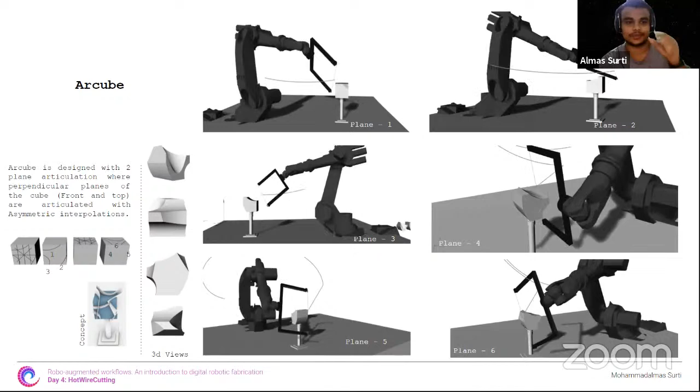Okay, sorry about that. So this is Arcube. What I try to do here is, simply put, hot wire cutting is basically a single line. If we are cutting at multiple points, it should be in a single line, so we can cut like a single curvature only using the hot wire cutting. But if we take perpendicular sections of attached parts, and draw different interpolations into that, we will be able to achieve geometries with double curvature of different radiuses. You can see the first 3D view is a very steep curvature, and then it's decreasing. So that was the entire concept.

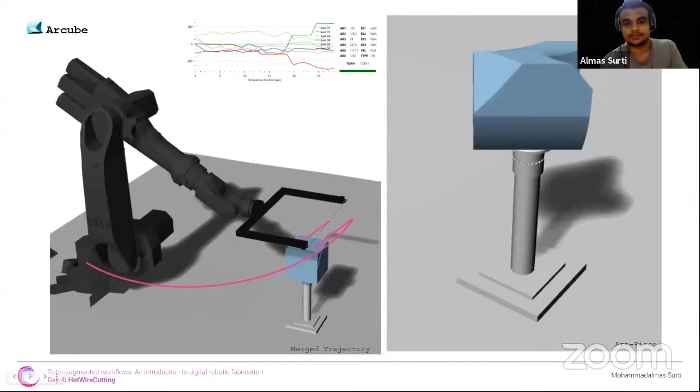It is made out of 6 planes, in 6 perpendicular planes in cubes, front side and top side. I have mentioned like 1, 2, 3, 4, 5, 6 in the previous slide. So all planes are cutting like this, a demonstration of that. If you merge everything's trajectory, then the next slide is the merged trajectory, and this is the final art piece.

Look at this dance of the robot, really, it's very fluid. What is compelling to me is really the form, and I don't know if you had something specifically in mind, but if I look at the second one, I think of it as a positive space, like a built space, while sometimes this element seems more negative. So that was the idea, to combine both curvatures. Like I mentioned in the previous class, I'm developing reconfigurable molds, more into anticlastic and synclastic curvatures and the possibilities of that. So that's what I'm trying to explore here.

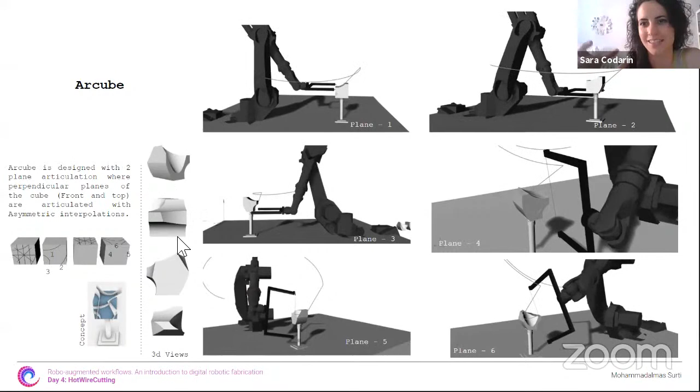Oh, that's great. I think it would be really interesting to see this deployed in the next step, and try to use this as the negative space and cast plaster and see what happens, and tweak things and rotate this and see what happens. Even if you don't work only with 90 degree rotations, but try to position that, let's say 45 degrees in the space, and see what happens in the resulting gaps, in the relationships between the container and all the gaps that you create. I think it's a very interesting exercise.

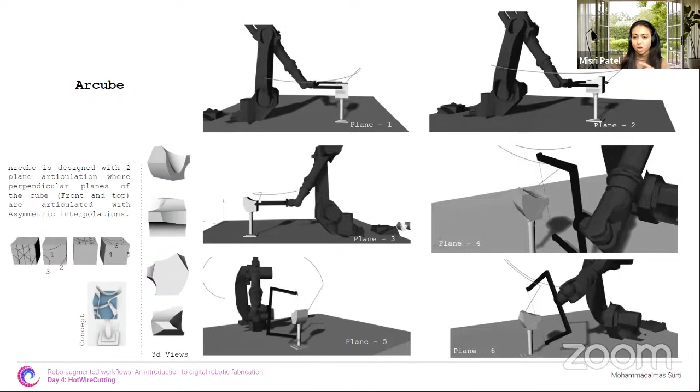Yeah, and the great part is, even when you cut the piece out, especially with the remainder of how you cut the first piece, which has this steep curve, in a lot of ways that also becomes not something you throw away, but something that could potentially help you transition to a next block. So that was the idea, one curve, and then the perpendicular curve will make it double curvature.

Jeff asked whether it is touching the middle thing or not. It's not, I've checked it in simulation, but I don't know, you need to check it on your end. But in the simulation, it is not touching it. I have faced one problem actually when we were merging all the trajectories of the 6 planes.

Handling those were very difficult. So what I did is I took like 2 planes at a time and tried to create a path. The first path I disabled, and then subsequently I tried to manage it, taking 2 trajectories at a time. Then if you accumulate, you will get the results. That's what I found out. Oh, that's a smart idea.

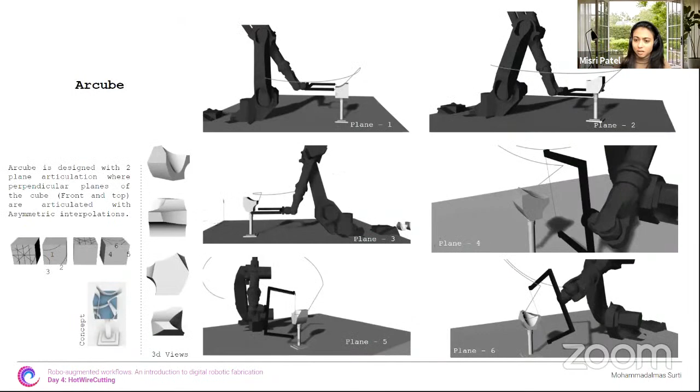Did you have to add more heights for the Z offsetting? Yeah, so this next one is based on the previous path. Then I can change X, Y, and Z. That was pretty simple. Earlier, for an hour, it was so messed up. And I tried to use it with 6 planes. Yeah, well, you crossed that hurdle.

And I was laughing a second ago because I saw Jeff very scared about this, but we'll make it work. I'm really excited about this. Let's see if we can implement this by the end of the day.

Jeff, are you laughing? Are those files already on Google Drive that I can check? Yeah, so I uploaded that. Okay, awesome, thanks.

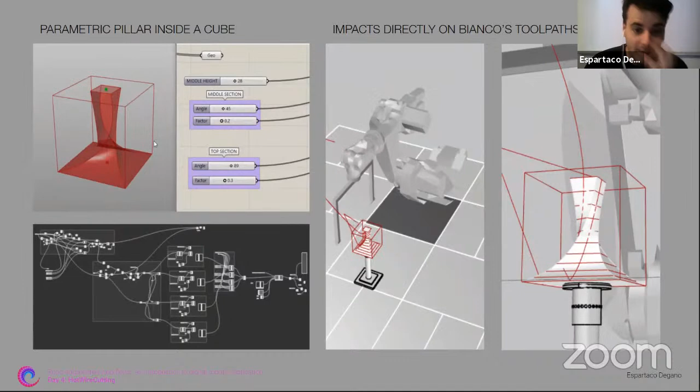Espartaco, let us know, I love your name. Good morning. Good morning, guys. I just woke up, getting coffee? Yes, yes. The coldest days of the year are just this week, so if you see me with my hat or the coffee... Really? Where are you joining us from? I'm in Argentina right now, but I'm moving in a couple of months to Spain, to Barcelona, the IAAC, the Institute of Architecture there. So to do some courses on robotics there.

Well, my work was about doing this parametric pillar that was inside a cube. Took me a lot of hours of coding, but I did it. I had this idea of doing 4 cuts, the same cuts, but rotating 90 degrees. My goal was to be able to modify parametrically that cube and impact it directly on Bianco's toolpath. So I did a lot of tests.

It's a simple process, but the coding was difficult because I had rotations on the form that later on the robot seems to be harder to control, clear without cutting the cube. So if you see in the cuts, I put an out point from one cut and out point up in the cube, and then the rotation of the hot wire doesn't cut the cube until the next cut. So I chained like 5 cubes and it seems to be okay, with no errors to the robot.

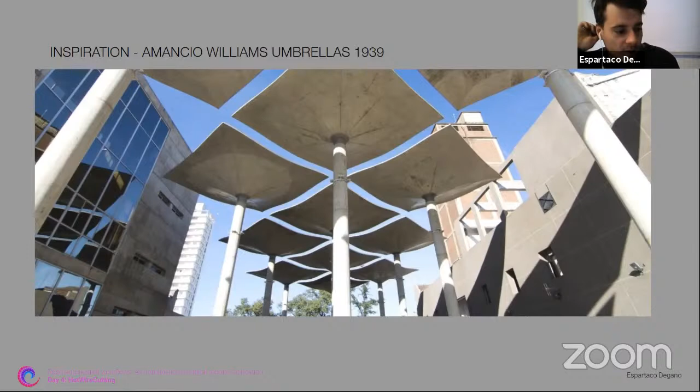Well, that's it. And actually, the thing is, we haven't introduced yet a rotation platform, because in this case, basically every cut goes with a rotation of 90 degrees. And you imagine like programming one cut and then you can rotate the platform and then you do the same cut over and over, right? Yes, by rotating.

Thanks for explaining, talking about the difficulties in fixing all the rotations and the script. Yeah, but it's also our limitation in terms of the hardware that we are using right now. But I think the next step is really to look into rotations and try to simplify some operations while using the algorithm.

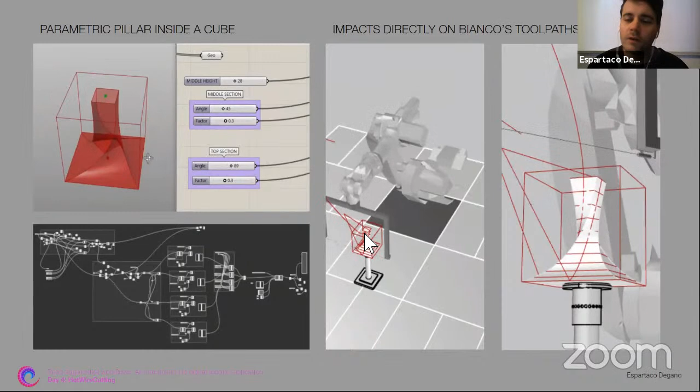Well, in this case, the rotation was four sides. I didn't think at the time that it was going to be so challenging, but I don't know. I leave you guys, Jeffrey, don't kill me, please.

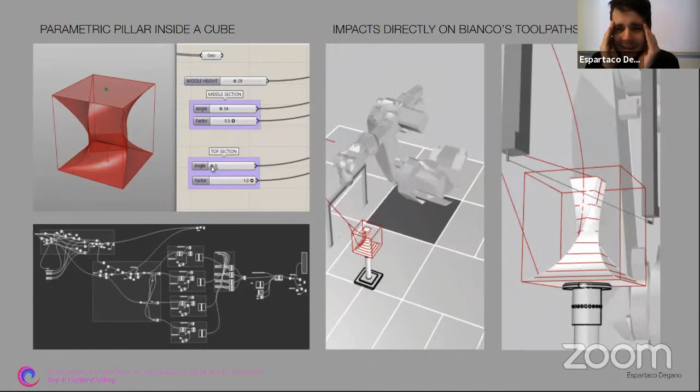Oh no, I think this is a really great way of approaching it because it keeps the four sides planar. It twists the wire, but in a way that we know is going to be predictable. So I think it's a really simple and really smart way of approaching this. Yes, I tried to keep the arch vertically on all the cuts, so it took me a lot of time to figure out how to do that, but I managed to finally present this. So I leave you guys with the files.

One quick question: was this the max amount of twist that could possibly happen? And if you were to twist either the top or bottom curve slightly more, would it start self-intersecting?

I tried the parametric approach, like 180 degrees, a flip. This form is like the nicest approach for this, but it can turn more - the middle section has to be bigger. When you want a smaller section in the middle, the rotation makes it smaller. It kind of rotates one piece around 180 degrees, like a flip, and it turned out great. I think it may be possible to take it further, but I don't think so because the form or the cube has to be like 3 cubes for the rotation to not break the form.

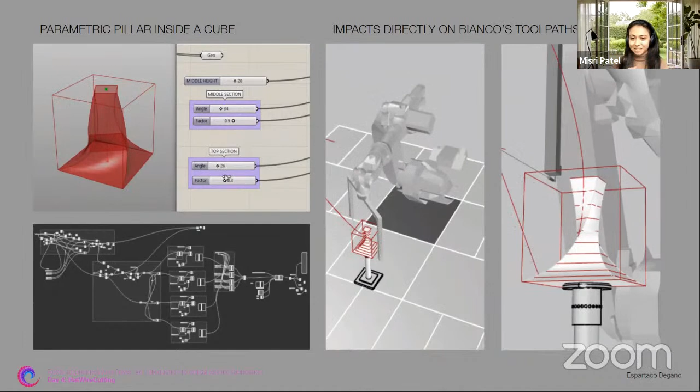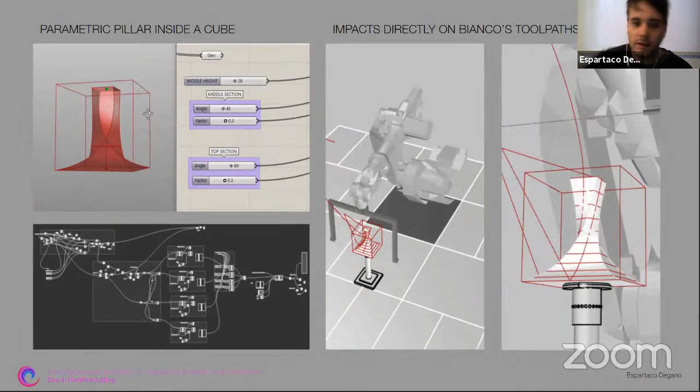It's great that you're thinking between two scales, a 6x6 model versus how to scale it up, so kudos to that. I think when the form is higher, the robot will be rotating from the side, not from the top. You have the robot above the cut, and the height of the arch for cutting. I think the scale of the model has to be a lot smaller to present more rotations from it.

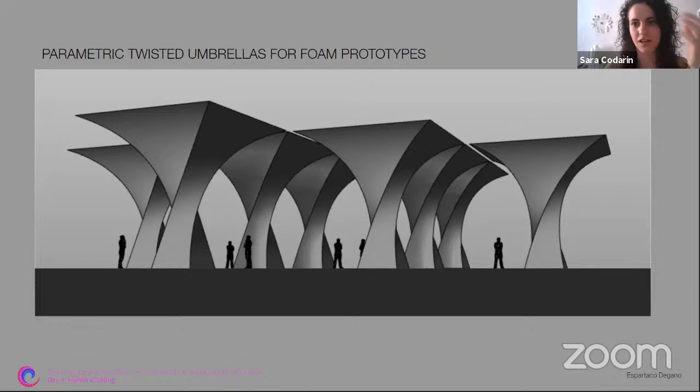It's also great to look at the approach - thanks for picking up on this strategy of imagining this larger scale with diagrams and simple rendering. I think it's very effective, and hopefully in the last assignment you'll feel more relaxed, not having to solve every single rotation for implementation. You'll have a slightly measured degree of freedom, which should help you go through the last part more smoothly. Thanks for this, it's very compelling, great to see the possibility to talk about different scales. Good job, Espartaco, love it.

Wow, thanks guys, thank you a lot. You're next, I like this. Thank you. How many? Okay, one slide.

I almost wanted you to pour plaster in that already. Oh my God, yes.

I wanted to experiment with the rotation to create a wavy surface, and it was really hard to organize it so the robot doesn't have any errors. I rotated the surfaces, but I think I should work with the planes more to find the best approach so the robot doesn't face errors with other surfaces.

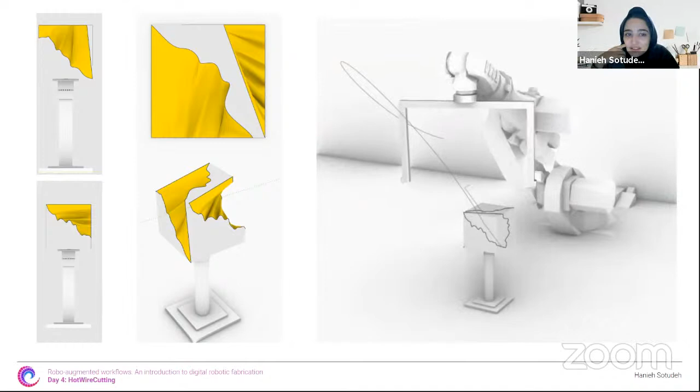And yes, I think these curvature faces look nice in the box, on the box.

Am I the only one imagining this material being gold? Like really gold pouring, a gold surface. It seems like a jewel, like a piece of jewelry. It seems so precious from these images.

Yeah, for sure. A couple of days back I'd seen a project where the cube was made out of concrete, and the yellow part was cast bronze or brass, and they were using that as furniture. So I think it has a really good product feel to it.

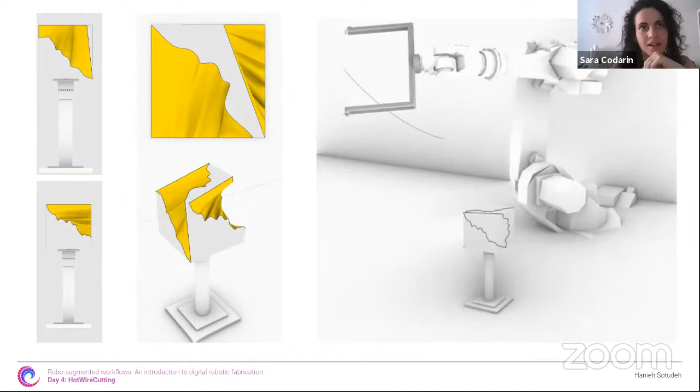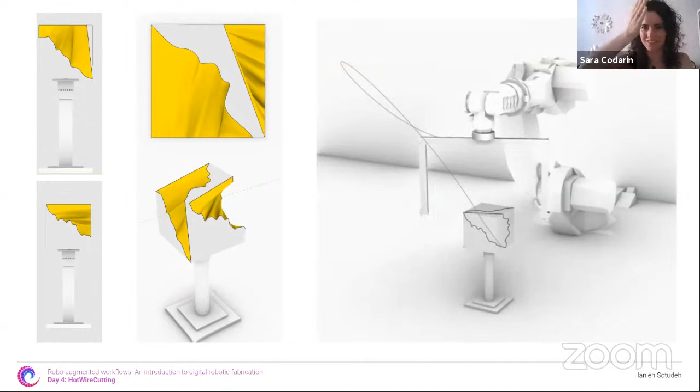Absolutely, and there are many ways to look at this. It seems the inspiration comes from the Grand Canyon, like a piece of rock carved by water over time - these layers of rock being the bio-inspiration that drove this design. I think it's fascinating. It's interesting to see this, where you have a couple of smart moves, and you can picture the negative space and imagine that, maybe flip your object and it becomes a building with some interesting sacred moments you can discover inside when you get into the space. I think it's guiding me through many worlds of imagination somehow.

Yeah, good job, it's great. I don't know, I'm trying to see the reactions from the B Lab as well, but since things are quiet there, I don't know. Let's keep going, for the last one.

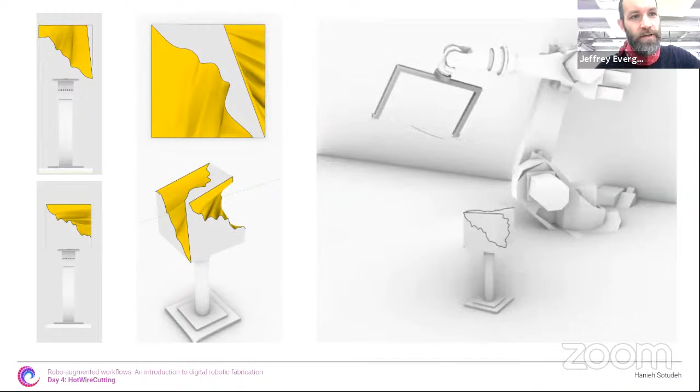Have you seen this one, Jeff? Oh yeah, I saw that. We're gonna have to take a real close look with the slider for potential collisions as the bow moves. Like from the pictures on the left, the yellow highlighted parts, one of them seems clear enough where and how it moves through, but I can't quite picture how the other one comes out.

So where the pointer is currently, there's kind of a line that goes diagonally across the top edge, and we see parallel lines sinking down, and then I don't know how it twists and comes out that vertical edge in the front. That part doesn't totally make sense to me. Then the slice on the right hand side of that cube, where the pointer is, seems a little more clear where it goes in and how it comes out. But that one on the left is really confusing to me, and we'll have to take a close look.

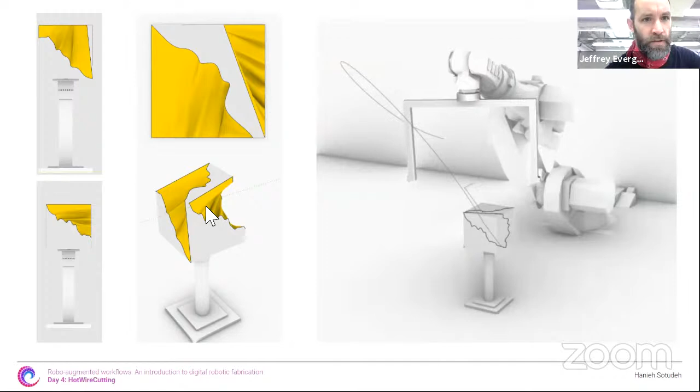Yep, the left one is similar to the right one, just because maybe I should put the other perspective of the cube to be more clear, but the right one is almost similar to the left one. They have similar approaches and similar curves, but with a little differences.

Okay, I can't really draw in here like Misri does really well, but if the wire enters the front vertical edge and then kind of pivots around that front lower corner, and then when it gets to the back as a diagonal line, changes and pivots around the top back corner as it comes out, then I can kind of picture an entry and exit for that one. But like I said, we'll just have to take a real close look.

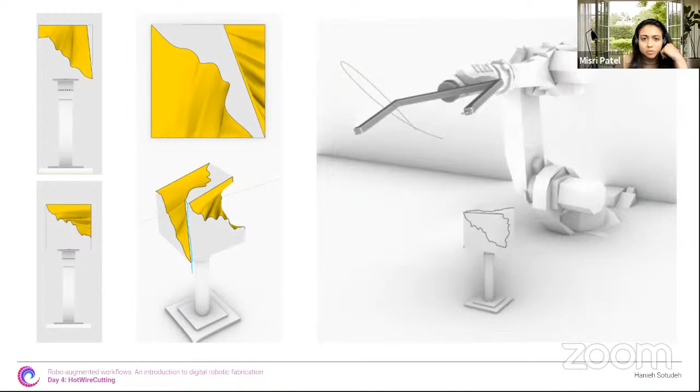Yeah, it almost feels like - I'm trying to imagine what the division points would be. Is this how we're dividing it? Is this how it's sort of, yeah, just like that? I have a feeling once the wire does start to do that, it's gonna be true to this line right here and this line right here.

But what happens with the surface would be a resultant of the tool path. And I have a feeling that might not necessarily match what we see in this digital space, just because the curve right where the cursor is seems longer than the other one, or maybe it's the other way around. But the fact that we're trying to use the input curves to merge the two lines, almost join them, and then extract the midpoints as the plane to align with the wire of the cutter...

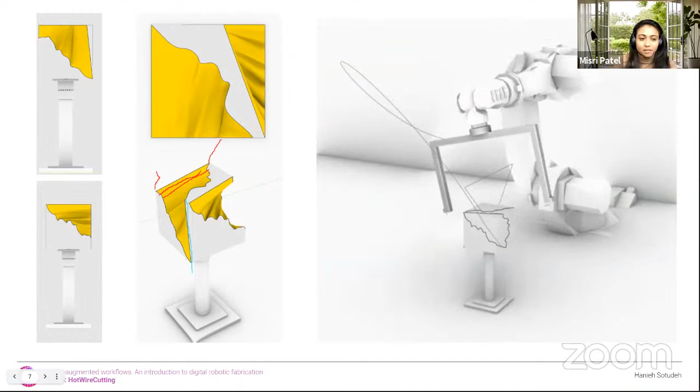I think that might give us a slightly different geometry, but it's definitely worth a try, because this adds that notion of the limitations of a tool, but also how do we simulate that to get a better handle on what to expect. It's definitely worth the conversation to take it forward. Yeah, absolutely, so thanks a lot for your work.

So who's next? Let me see. Slides, that's okay, my work. That's my work. Hi, everyone.

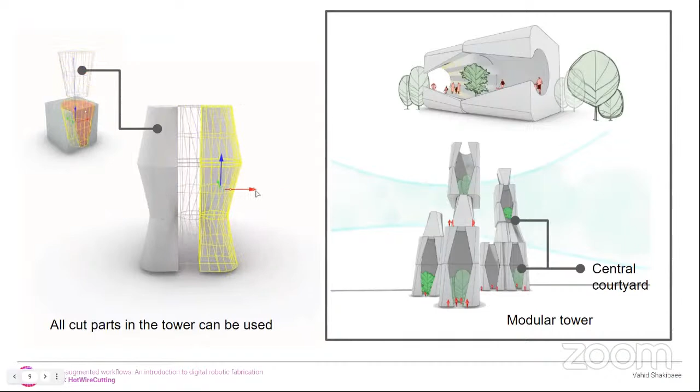And this modular tower, I try to use the cutted other side of the cutted cube. That's a connection between the modules of the tower, and the cut pieces are the floor of the central courtyard. I say that central courtyard is in the middle of the tower, and that's it. It's my work.

Wow, you really deployed this notion of stereotomy that we described yesterday, in terms of really working simultaneously in two parts and then they can come back together. That notion comes from the craft of cutting stones. So it's really effective to see this approach deployed in a way that we can see both spaces, the positive and the negative of the same geometry, and then start to populate the space with these elements.

I think it's again sort of a deterministic approach in which you're trying not to waste resources and to create the most out of it. I think it's a very compelling example.

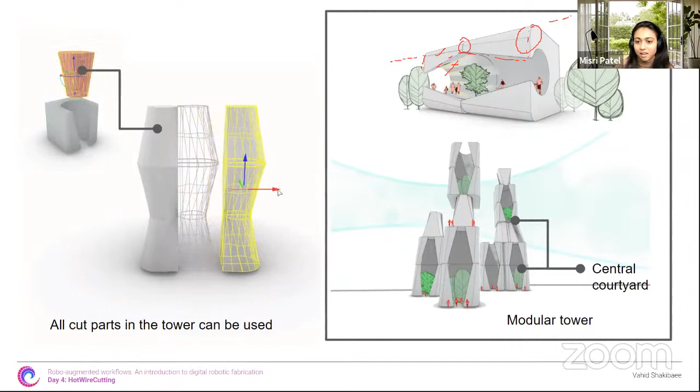I'll be sure to drop a link to that project, but this comes super close to it. It's also good that it's challenging methods of production on construction sites, and pushing the boundaries of what's really happening on site right now.

And Vahid, in terms of scripting, how was it? Did you have specific difficulties? Was that easy or difficult to script? No, it's that easy. I mostly draw the curve in Rhino, and export that into Grasshopper for simulation with the robot. It's not so difficult to me.

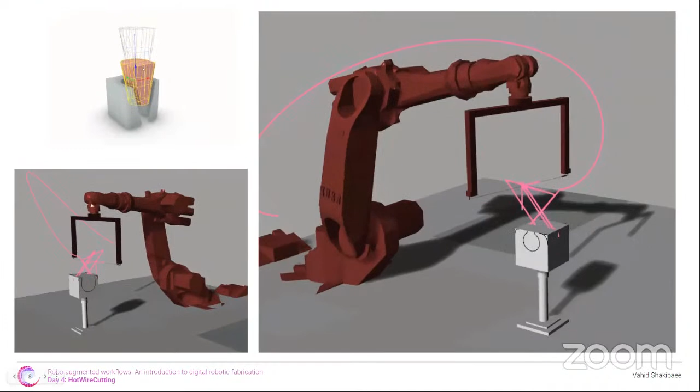Great, so you optimized literally everything from the design to this notion of use of matter. I think it works pretty well. Thanks a lot for your work.

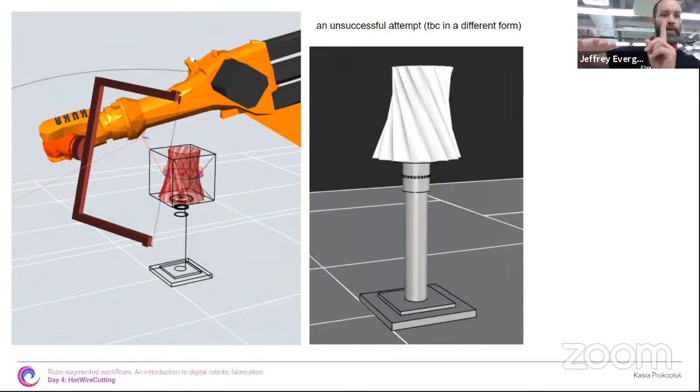Because it's going to need to make some motions where it reorients itself. If you wanted to try a single swooping motion, another option could be, if it was designed in Grasshopper parametrically, to change the angle. That might help in this circumstance because of the position of the pedestal relative to the robot base and how much reach is necessary to get around. If it didn't have to go quite so far, it might be able to do it in a single sweep. So those are my two ideas.

Since it's vertical, I'm curious if you tried putting it horizontally and if that changed anything. Yeah, I tried first to put it horizontally and cut it out from the cube. It was a little bit smaller then, something like a Peter Zumthor, to see the negative from the inside. But it was too difficult for me.

But did you upload those files? Not yet. I think we can try to take a look and work on it later. So, as Jeff said, a little bit longer and send you the files, and we can fix it together. Today Jeff and Emily are in the build lab, and they'll be available to implement this, so I'll try to help you out so you can have this object as well.

Let's try. Thanks a lot for this work, fascinating, and hopefully we'll be able to produce these things. Other comments? Otherwise, I'll go.

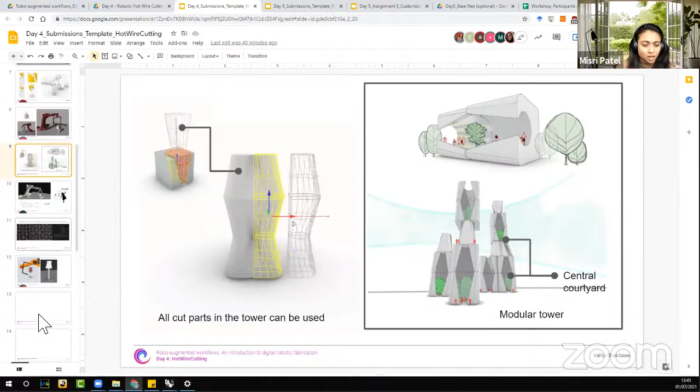We have 15 minutes. I'm trying to dig in because I think maybe 2 years back, someone was trying to pull off a similar project like we saw on slide 12, and I know they managed to do it. So I guess it's a matter of rotating it at the right angle to accommodate everything. Let me dig in, and towards the end of the lecture, hopefully I find it and can show that project to you, which was also at the same scale. So hopefully that helps.

Thank you very much. Thanks, Misri.

Submission template, no. How about we go here? Then I have a couple of base files to show you. But let's start from this first. Let me do so that I can see the following slides. Here we go.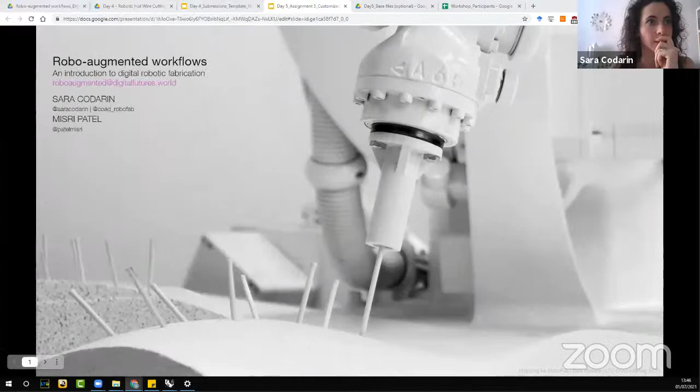Okay, so I'm seeing some comments from the build lab. We can discuss these things later as well. So we are approaching the last exercise, but I think we have mentioned already certain things.

I think you understand now. You have already expressed this approach of showing things at different scales. I'll jump right into the description of the assignment, and then show some examples for inspiration. Again, you should be less stressed. There's less code to be figured out, and you can imagine a very simple component and work on that however you want. This time you can pick the end effector that you want. You know how to model an end effector, and you know how to place it at the origin in Rhino.

You know how to plug it into the Kuka PRC core, so it's really up to you. Show us another new concept if you want, or you can take something you developed previously and add more examples of aggregations, or ways to use the texture on a wall, or another architectural scale application. Because what we're trying to do is to imagine that...

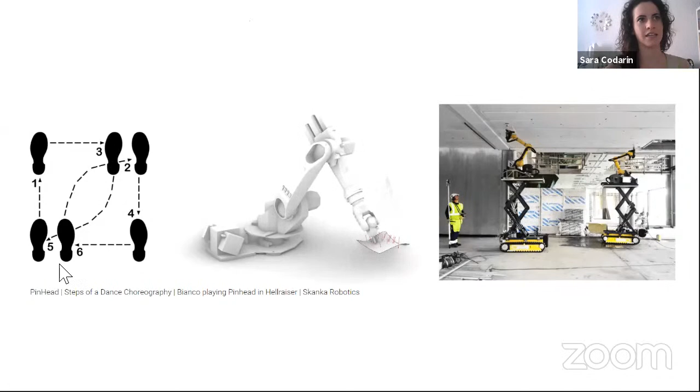And even if, for instance, we come back at the same point, that point will come as a result of a more complex sequence. This just tries to imagine the sequences of understanding surfaces, understanding the space, understanding the implementation, the rotations at a larger scale. So this is the main concept.

If we just jump back, right here I think this exercise is super interesting, because what the robot is really doing is it has a tool head which holds the nails and goes to the surface and pushes it down. What's interesting is we're using this junction as the feeding spot. So every time it goes down and places it, it comes back empty-handed.

And that's where the human concept comes in, because it also challenges the notion of what a robot can do by itself and where humans can be roped in, where a human can be like the feeder of nails at some point, because it's fairly repetitive, but we're also relying on the robot for precision.

I think it's a good exercise to look at existing construction sites to see where the gaps are and where we could use a slightly more streamlined process with the robot, but not forgetting that humans also have the capacity to decipher and understand a lot more quickly, or sometimes react in a meaningful way. So we can have a debate over this process, and instead of saying automation takes over, how can we leverage the strengths of both working parties?

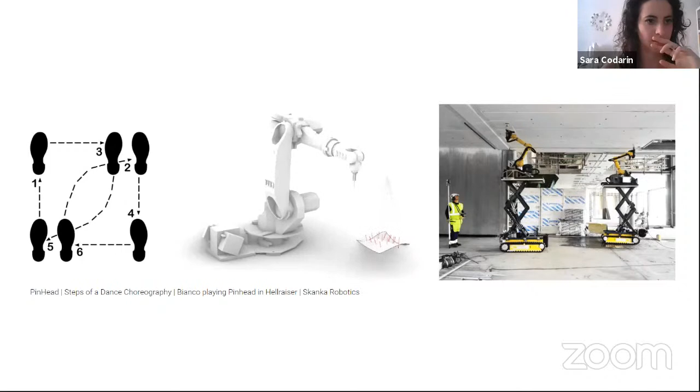So last effort, if you guys want to proceed with the exercises, what we're asking is to speculate on the process and imagine the realization through robotic fabrication of one unit, one element, and then imagine that at a larger scale. You can, if you have time, depending on your daily life and the time you have at the moment.

But you could imagine even multiple sequences of tasks of end effectors that can create together a combination of outcomes, and then you put them together however you want. So elaborate a concept, and this time it will be simulation. We're expecting to see some provocative images on the Google Slides file. Produce a building component that could be part of something bigger. In a way, you are informing through a robotic process the construction of an architectural system.

I have one question, Sara. Yeah.

So my question is about having an extra input to the work that the robot will be doing. Like if on the pointer it's kind of grabbing something at one point and lifting it over at another point, how does that input enter the Kuka PRC?

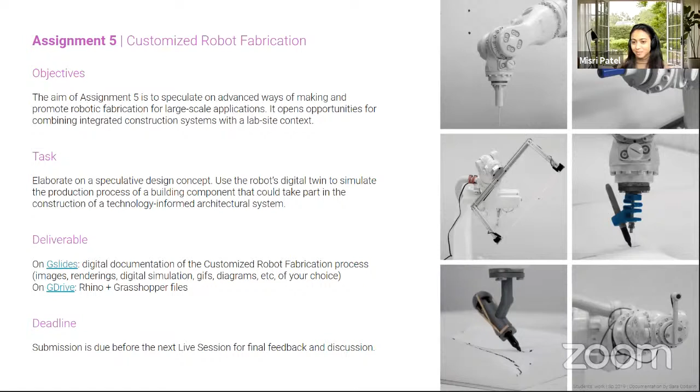What I was trying to get at was if you do have ideas which require this, we can propose that, and at least then we can talk through some of the things that could happen. And then you can always get a robotic integrator to actually do it for you, because our skill sets are also limited as architects.

I'm seeing Karl already with us. Karl, do you mind if we spend another 5 to 8 minutes just discussing real quick a few things we have to cover, and then we give the floor to you? That's no problem, whatever you guys want. Okay, and then I can properly introduce you.

Thanks a lot. I'll go briefly through some examples, some inspirations, and again you can think about even more complex processes and then express a concept. That's totally fine, you don't get crazy in one day trying to figure out all the scripting.

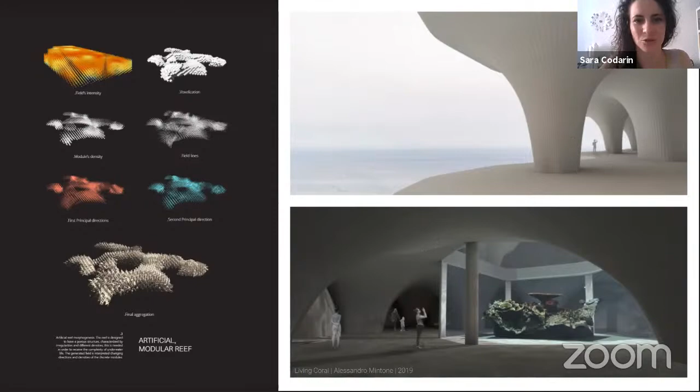More from the same portfolio, just in terms of imagining one element, one morphology, and then trying to express that in architectural terms - scaling this up and putting elements so we can understand the scale, the dimensions of the object, and that could be one way to look at these things.

It's also a great example of what Espartaco was talking about two days back, and it aligns really well with that concept of transporting stuff as either a building block or larger structures in general.

Just two days back is when Gramazio Kohler unveiled the clay wall they recently made. I highly recommend you guys check that out, because I think it would be a good speaker point for sure.

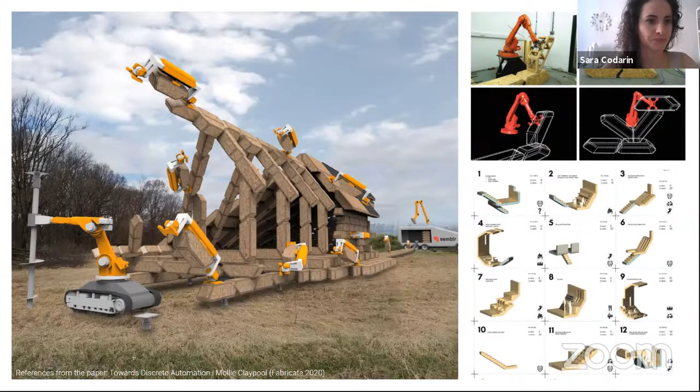I left this as a last comment, knowing that Karl will come here today. This is actually one reference that he found from Lebbeus Woods that talks about the fact that, in a manifesto—and we mentioned some of these things already—just putting scale figures in a scale model doesn't make an architecture automatically.

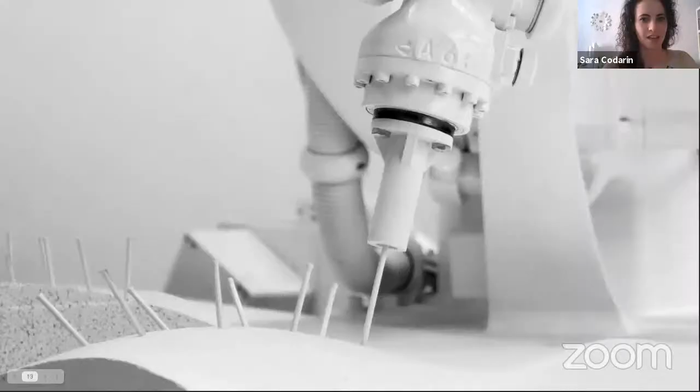Before giving the floor to Karl, I just would like to show you quickly something in the base files for day 5. You can find a bunch of scripts that I'll show real quick in terms of approaches. We don't have time in 5 days to cover everything—I told you about so many factors—but I left some stuff here for you to explore, if you want to look at 3D printing, for instance, or pick and place exercises.

So let's start from this. I'm just showing the simulation—you can look at the script. You guys already have some good grasshopper skills, so I don't think you'll have issues understanding what's going on here. But basically, if you want to include this in your process for this last exercise, we are more than happy to see this deployed as well.

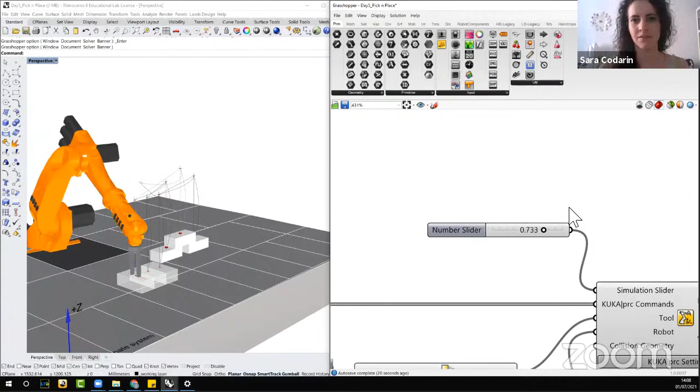So if you want to use this script as a demo, an example, a case study, and then create an articulated parametric wall or something composed of discrete elements, feel free to do that. In this case, as you can see, the gripper is not opening or closing—we're assuming it's a vacuumed kind of tool.

And by the way, the input should be into Kuka PRC—analog and digital inputs, analog output, digital output. Those are the elements you need, to first answer your previous question, to include in the script to have that relationship between the robot and other external inputs. So that's one script for you, just as workshop material.

We've been talking about so many different processes—we looked at wire cutting, milling, and other things. I think it's also a good opportunity to marry the two, or cross-pollinate between two or three different processes, which might help you come up with different outputs in a lot of ways.

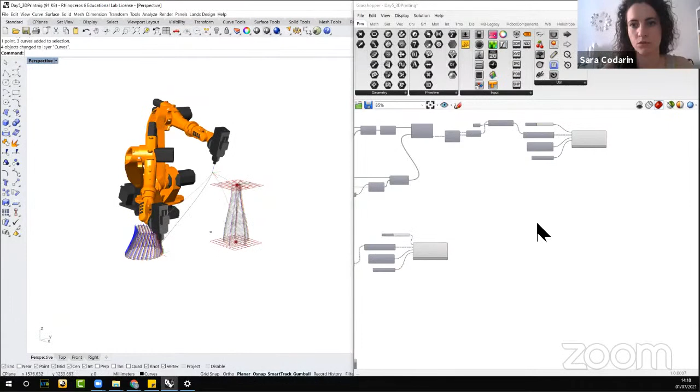In this case, we have two different approaches to 3D printing. You'll see two robots, just because I really wanted you to look at the same 3D printing process deployed in two different ways. In this one, through using contour lines—just parallel offsets—you can control, in millimeters, the thickness of the layers. And you see the robot with a generic tool end effector completing an extrusion process, going from the bottom to the top of the object, as I'm imagining this to be a 3D printing process.

Slightly different approach here—hopefully from the preview you can see that. It's basically a spiral: instead of having parallel layers where you hop onto the following one, in this case it's a continuous line that goes as a spiral, so it's a bit more sophisticated. Just take a look if you're interested—in this exploration, right here, you don't have a jump; you might notice it's an inclined line, so it goes with that pattern.

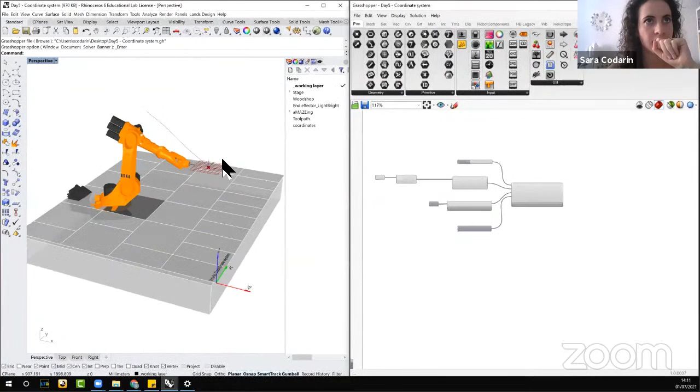Last thing, for those that don't remember who asked me this yesterday, to try to understand better what it means to set a tool, you'll find a PDF workshop material that explains it. It just means taking the teach pendant and plugging in numbers that need to match the numbers in Kuka PRC.

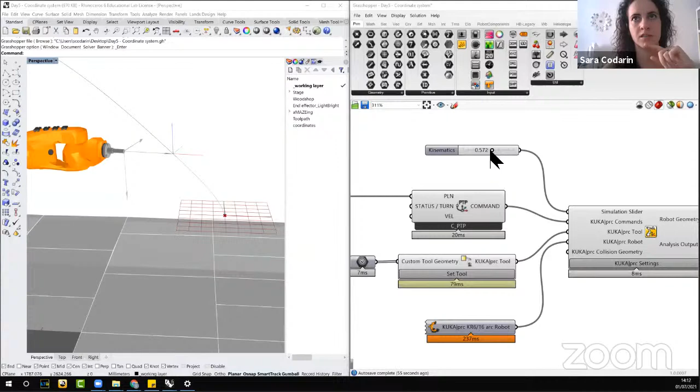So I made the visualization of this plane bigger. If you guys want to experiment, take a look at this and take some time to understand rotations.

For instance, I only have one point in space. I'm reaching that point. Now if you want to change the rotations, imagine that when we rotate Y, you're addressing the tool in this direction. So if I plug in 90 here...

And then I have this condition. Similarly, if I put negative 90, you have the end effector approaching the point in this way. But we can even rotate this, or maybe C works better to understand.

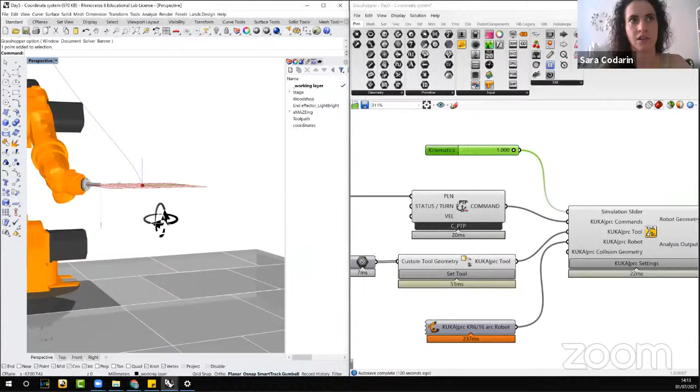It's really a geometric thing. It might take a while to get into that logic, so maybe this file will help you. And of course you can rotate things also 45 degrees, not necessarily sticking to 90. It depends on the script, the toolpath, and the end effector.

One thing I wanted to mention, and this is really the last one: these arrows correspond to these arrows here. The first is Z, this one is Y, this one is X. Those are important because with the teach pendant, you can address the robot following this coordinate system. So if you press the Z vector, the robot will advance in this direction, following this vector.

So it's not following the world coordinate system anymore, you're controlling the end effector. Those are the things I wanted to mention. Take a look at these files, just for understanding a wider range of end effectors. It was a bit long, but I really look forward to introducing... It helps a lot. Okay, awesome, thank you, I'm glad that helps.

So let me find the introduction for our guest lecturer. Oh, by the way, I found that file that was intersecting with the wire cutter and the tool pathing. I'll put that on the drive, and we could come back to it tomorrow or later toward the end of the session. Which one was that?

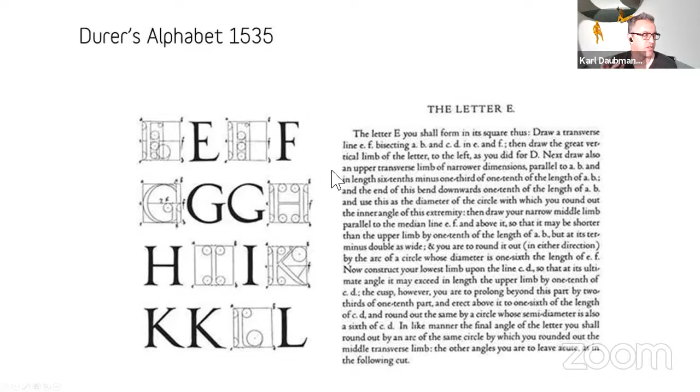I like these ideas, and another reference for someone whose work and writings I really appreciate is Anni Albers. Anni Albers is a Bauhaus textile artist. She was the wife of Josef Albers, the Bauhaus painter. She talks about how very often, or typically, design is understood as how we impose form on a material. I think that's a pretty common thing.

Even in the way that we set up most design process, we start at a large scale, urban scale, a site scale. We refine and define a form, and then at the end, we choose what materials those are. And she suggests flipping that.

Materials, and I would say process, has things that it can tell us. Often if we think about defining the form first - I had a colleague who always talked about design as like form descends on material. If we flip this, we can kind of listen for these things. What she describes is listening and being receptive to the materials, and I would include the process in that.

So what does this process mean? What does it look like? What are those trends? I love Louis Kahn's work, and he made this distinction between form and design. Form is what it is, that's the kind of shape of it. Design, instead, is this circumstantial act.

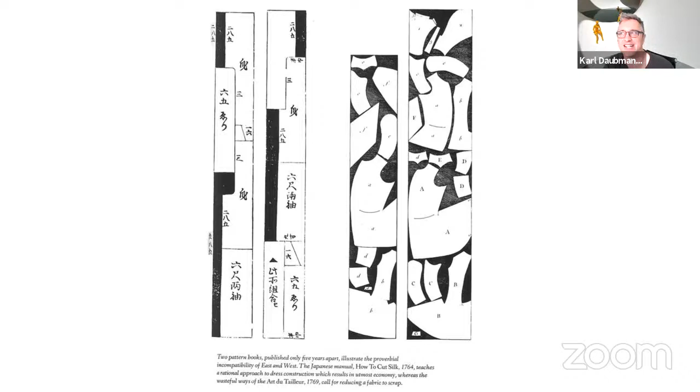I think there are lots of opportunities as we think about sustainability and other issues to recapture material, to think about material in a different way. As designers we have to understand labor, and that's something intangible that we often can't deal with in school. The fact that we're separated from the construction process means we don't even understand those labor costs at points.

This recapturing, or this notion of the master builder, is interesting - we can flip the script and use robotic fabrication to have a direct connection with means and making. Same thing goes with the hand - if we talk about craft, it's inevitably tied to the hand, where we get direct feedback from a material to our body.

So how do we start to think about these things? There are ways of getting feedback from the robot as it deals with the material, as it engages material - some people are working on algorithms that adapt while putting things together with robotics. I'm interested in connecting this loop so we can get feedback from construction, fabrication, or manufacturing as a way to make design that much smarter.

For me, there's that kind of evolution. I said I was going to reference a lot of books. This is a really wonderful book called The Hand, for anyone that's interested in craft. But I extend this to thinking about robotics, and the way the hand evolves evolutionarily, I think the robot can also extend the dexterity of a designer. So there's an evolutionary jump that might happen for us with that.

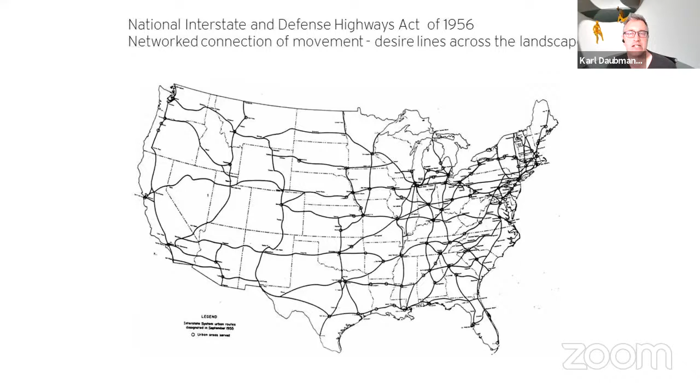Historically, where does this come from? How does it work? I was really interested in the way that rules produce form, and the way that, like the Anni Albers issue, really good designers navigate constraints and work with them. The rules should change over time, but often they don't. Just looking at the difference in the design of a car, safety issues, performance issues, efficiency issues, style, culture issues, all of these things evolve. But we're stuck with a highway system that was designed in the 40s, and now we have different constraints. What does that mean for turning radiuses, speed, sound, all of these performance characteristics that might be changing?

I was interested in the relationship of architecture to the highway system. What does it mean to design a building based on the highway system and vice versa? And what happens with electric cars and other types of autonomous cars? Can architecture and infrastructure begin to grow closer and closer together? This was a really interesting precedent from 1973, where they were actually proposing that computers could be used to design the highway system. Just a research paper, but really forward-thinking as it relates to that.

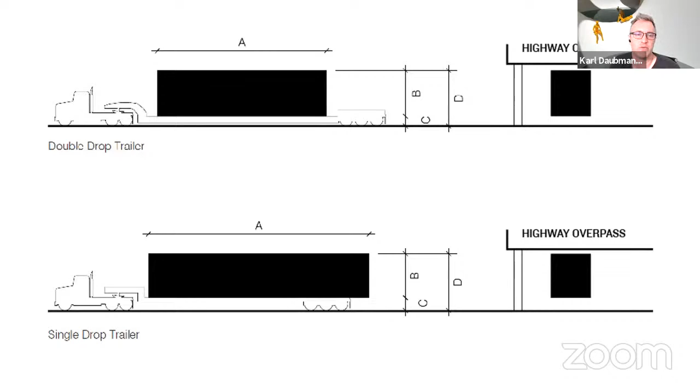Issues that I had to contend with shipping houses on the backs of trucks, the highway overpasses, all of these dimensions govern manufacturing constraints. If we think about the movement of goods and logistics, and the way that these things change, many of these things are tied to the highway system.

I'm already projecting this notion that before you drop a specific product into your BIM model, it's going to tell you how many other designers already picked that tool today, how it was used over time, whether customers have been really happy with that product specified. We can get a lot smarter with crowdsourced data, and we're not yet seeing this in design tools. So that's something I'm interested in, crowdsourcing some of this knowledge and being able to share these things.

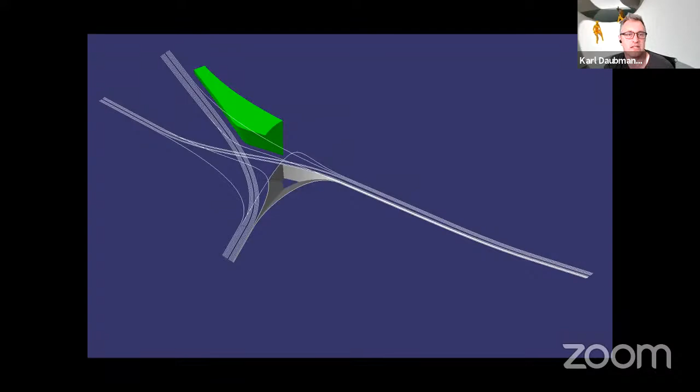But the way we think about connection, there's almost a kind of tectonic quality to these. How do we connect these two different parts? So we started drawing these and trying to understand those constraints, starting to look for opportunities to make space and buildings and landscape between them, and started to uncover these issues within the city.

This is Burnham's plan for Chicago. And what's incredible is that this, not unlike the plan of Detroit, has this kind of pitchfork, but Burnham's plan had this incredible civic space located here. They cleared out the space in preparation of the plan, but it coincided with the production of the highway system.

So what results is that civic space has become - I don't have a good picture of it in Chicago - but it's what's called the spaghetti bowl. It's a desolate, empty space that's a string of highway that just moves through. So it's this disparity or discrepancy between the scale of the highway and the scale of the city. These two things don't always go together.

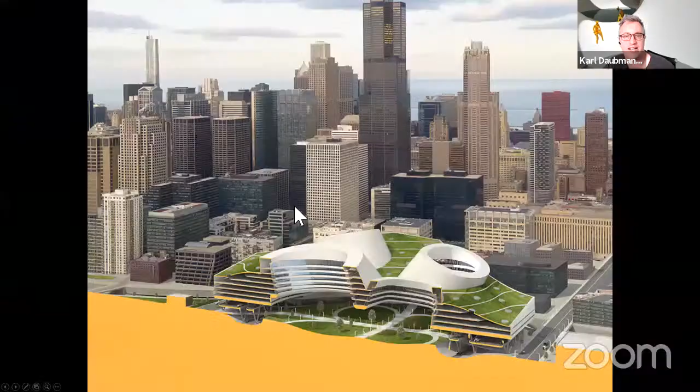So we looked at this as a site for a building and tried to reclaim this huge space, which is just infrastructure, for a civic building. But also tried to reclaim the kind of cloverleaf aspect - how do we think about a building organized this way? What does it look like? How does it do these things? So this was a kind of proposal.

We can see the Sears Tower, or Willis Tower, in the background and its relationship to that as we cut through, thinking about how the infrastructure may move around, and then a public space, landscape space in the middle.

Another space we looked at on the south side of Chicago was a connection from one highway to the other that essentially bisected this community. So taking those kind of rules, shifting the highway, moving it over, being able to slow things down, and starting to think about what's the proximity we can create with these things.

And again, thinking maybe the highway can be a beautiful thing if it's not noisy, if it's not spewing pollution, if it's not doing all of these things. How might these relationships begin to change with that?

So it's really a study in parametric design, but again highlighting the fact that these kind of constraints - and many of you have been working with constraints this week with robotics - the scale of these things, what are those dimensional constraints, how does it rotate, what space does it fit within. Going back to that Anni Albers notion, how do we learn from those things? How can those things be productive and start to set limits for us? Designers need constraints and limits. That's how we work, that's how we think.

And so a second project, maybe more closely tied to some of what you're doing this week, was a project we did, also a research project, called Robo-Pinch. And it comes from this.

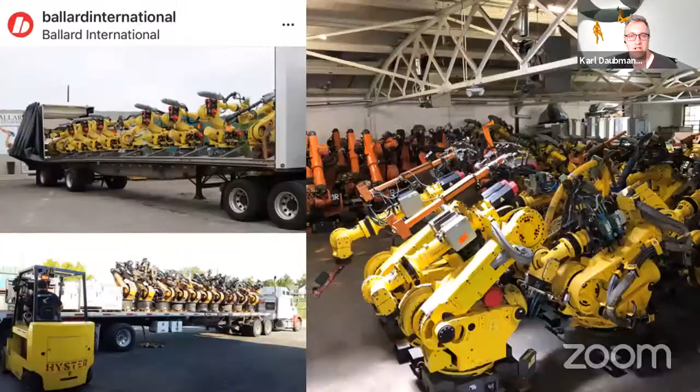But what we wanted to do was take this kind of learning and this kind of feedback and the input of the hands, and imagine that instead as grippers or other types of parametric control through the use of the robot.

So if I go back a couple of slides, these are some of the things that are at stake. Another really useful book, if I assume all of you are interested in robotics, is about the notion of the fourth industrial revolution, which is something that's changing.

If we look at the impact of Henry Ford in that industrial revolution, the change of robotics, biology—these kind of big physical, digital, biological trends are going to change the landscape that we know. Klaus Schwab put together this really great, simple, small book called The Fourth Industrial Revolution, and these are some of the issues.

I know that Sarah and Misri have probably talked about Ballard International. I hold up Ballard as a really, really interesting place that I describe as a halfway house on the road to the fourth industrial revolution.

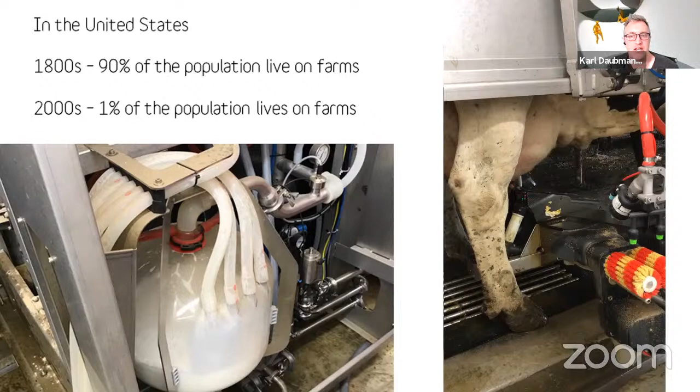Not to get too much into the robots, but the dairy farmer can't find people to work on the farm. So this isn't a displacement of labor—the farmer just literally can't find people that want to do this work anymore. Again, a kind of first world problem. So the robot becomes a way that it's not putting someone out of business, it's not harmful to the cows, and the farmer cares very much for his cows. It's changing these sets of relationships.

So what happens if we think about how robots work with this? Can we design at our desks with a robot? Then that robot, the scale of those things scales up to where we use the same type of robot—there are robo-dozers to do site work. It's pretty easy to imagine a robot installing facade panels on a building.

The connection between what we do with models and an idea, or physical analog models at our desk, don't necessarily map to the way that we build things, but they could. Imagine sitting at your desk building a model and building things in the order that they would be installed on a construction site. Can we simulate a much larger process at our desks?

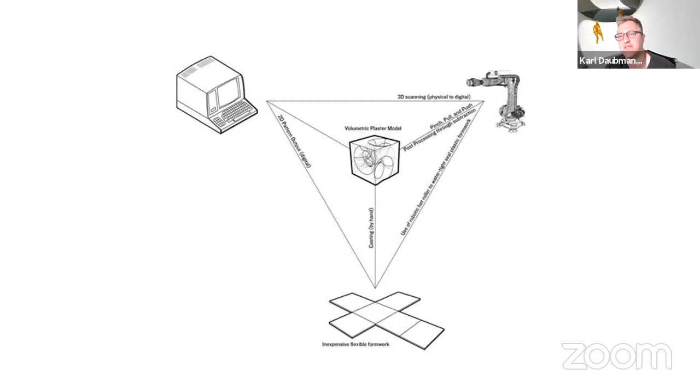These types of models in some ways were much faster to make and prototype. They could also scale up, so something laser cut at a small scale—I have a class this summer working on this—the same file that we laser cut the physical model with is the same file we use to produce the thing at full scale through a water jet. The same can be said for going from a small robot to a large robot.

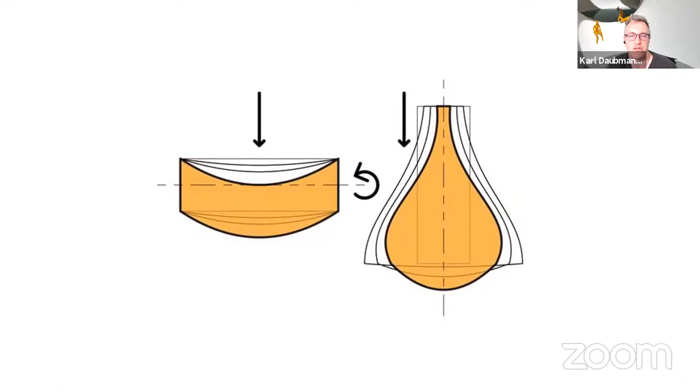And so here's where the Gaudi comes in. If it's a fabric formwork, if we turn it on its side, gravity will cause this to slump. If we stand this upright, gravity will force this to slump in a different way. So form finding, using gravity, using internal pressures, doing other types of things, being able to pinch it or poke it—I guess this is a poke.

Pushing from both sides displaces material. It doesn't remove material, so we're not producing waste, we're just shifting material. If we pinch it and pull it, there are other ways the material is displaced.

We started to look at this kind of parametric process: if we want to poke a material, these were a series of small cube studies we did with flexible formwork. Just through changing the robot—the simplest code, go to this point or this point or this point—we could produce parametric variation very easily and inexpensively. Thinking about Gaudi, how do we slump material without the problem of someone having to hold this for 10 minutes while it cures? Being able to move the robots to specific locations lets us produce a specific form from this.

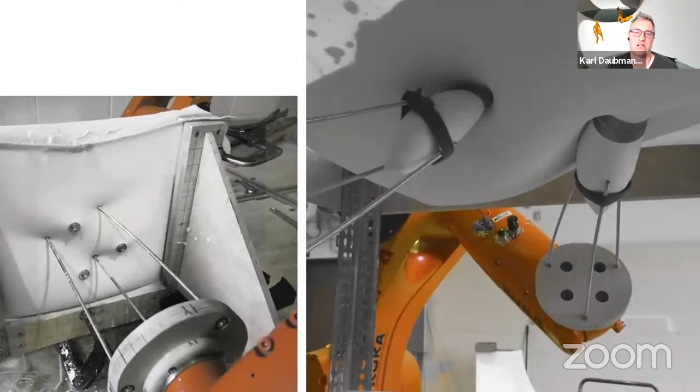If we wanted to replicate it, we could have the robots go to the same location. If we wanted to look at variation between these two points in space, we could make small incremental changes and produce different models. These were holding pieces that had already been cast in place while we cast something else in relationship to it. And we produced hundreds of models.

These were intended to be small analog physical models. They could be replicated easily. They were very precise, but also incredibly inexpensive because of the cost of the formwork and the plaster material. So we could prototype these things—look at them, sand them, cut them, crack them, post-process them in a number of ways.

Here are these moments of being able to poke the material and displace the plaster, producing what I thought were really incredible forms. At the time they were very difficult to model. Now, through subdivision modeling in Rhino 7, and Gravity Sketch with subdivision modeling, many of the forms we're creating here are much easier to produce digitally. We didn't have digital models for these—the only thing we modeled was the action of the robot. The form was a direct result of that.

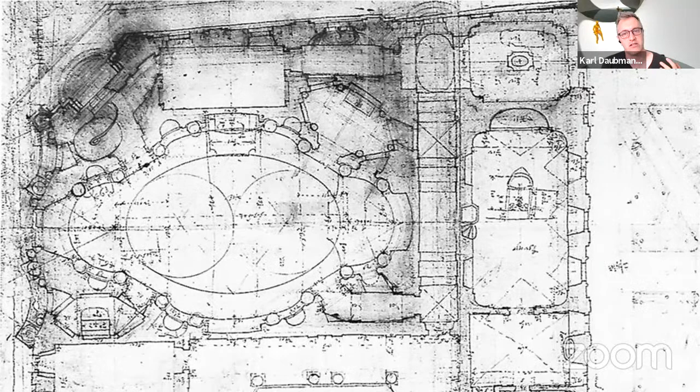So how do you locate this point in space? You do this. Okay, how would I locate that on a site? He understood these things back and forth. I love this way of drawing how we would construct something and embedding that within the model. So for a couple months, I spent time visiting, measuring, documenting, and beginning to model some of the Borromini spaces around me in Rome.

Embedded within the parametric model were those rules and constraints, and then I looked at beginning to relax those rules. Does it have to be bilaterally symmetrical? No. What happens if that changes? What would these things produce? There were these drawing and 3D prints, a whole series of analysis work that came out of this. You can see some of these details, the drawing, and then the three-dimensional form.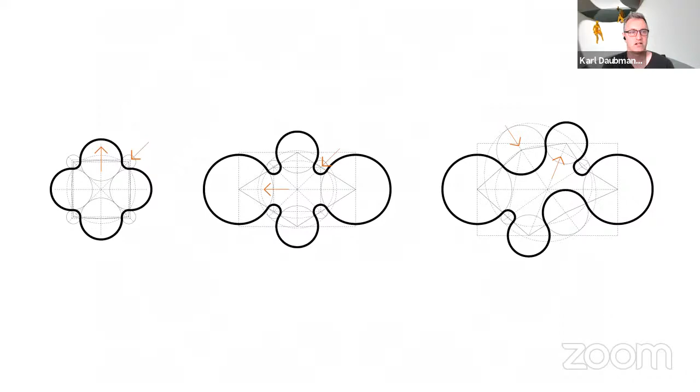Using that parametric data to produce some animations showed a common motif he used called the quatrefoil, four concave and four convex radii that produce one shape. But again, these are bilaterally symmetrical. So from that, what happens as these things begin to be relaxed? Going from a Borromini example on the left to almost what looks like one of the Aalto vases we're all familiar with—same rules, but some of them relaxed, allowing these things to vary and change.

I think there's a lot of opportunity to reclaim old algorithms or old rules and start to look at how they might evolve and change, and then three-dimensionally, what happens as some of those rules are relaxed.

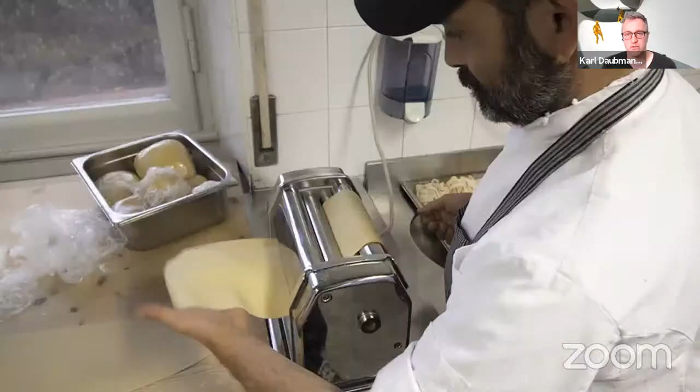One project that came out of this—we've got a couple minutes left—is the production of a set exploring the hand, which I referenced earlier, the notion of the hand and how we work. Living in Rome for a year, I was also eating a lot and started to make a connection between the scale I was working at in this analysis and pasta. So what came out was an investigation in pasta.

Let's see, I know there was a chat, but now I can't see it with everything else.

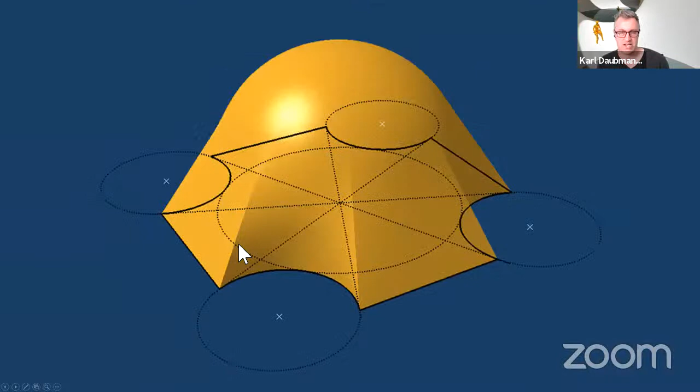This was another example with the draft angle—the difference between this surface and later controlling that surface and being specific about it had to do with these types of issues. Those two surfaces were too close together and sheared the pasta, or it stretched too much.

So controlling the thickness of the pasta—imagine going into a kitchen and saying, all right, we need to roll out the pasta 1.25 millimeters thick in order to get this to work. I think I have a picture where they had a ruler and we were testing the thickness as we were rolling out the pasta.

This is a section through a different form, with registration pins, and you'll see this little part as it comes down trims the pasta. The way the models got smarter over time—this is 1 millimeter thick, but it started at 1.25 millimeters thick, and then it gets pressed and squeezed.

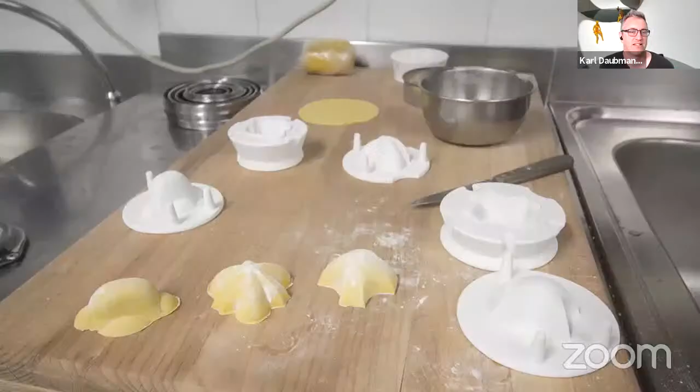Here we can see measuring the thickness of the pasta, and then these were the three shapes: San Carlino, Sant'Ivo, and Santa Maria dei Sette Dolori, three Borromini churches, and these are the pasta presses we produced. Over time this also changed considerably, working with great collaborators.

This was a pasta dough that had egg within it, and my collaborator said, well, Borromini's spaces are white—what if we looked at a different dough mix that didn't use egg, that used oil, so we could get a whiter pasta? You can see that kind of material experimentation happening.

You can see all of the prototypes, labeling each week, numbering and dating them so we could learn as we went. How we cut it, you can see the registration pins, and then starting to produce these.

And this is that offset of the labor—not made by robot, but having to understand who or what is going to be building the thing, and how do we inform that? How do we design these things?

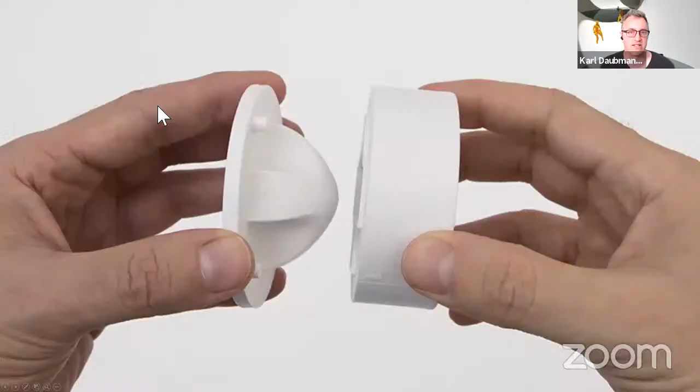This was looking at the hand, and the first stage was only controlling the internal piece, but over time you'll start to see shaping the external piece to think about this as a designed object—how it registers, a flat edge and a flat edge.

There start to be thumb holes cut out here, the registration, and then this starts to get shaped over time. You'll see, thinking about the hand, a portion that's cut out for your fingers. So it really started to specify how you hold it, where you hold it, and how you press it together.

It's kind of an evolution of this design process, looking at these things, designing the two halves, how it presses together. These were all done with ABS plastic. The goal is to develop these out of brass and begin to offer a high-end kind of tool to make these.

We also looked at the sauce, an early kind of pure version with just butter, a red sauce in a very traditional way. But again, my collaborator said Borromini's spaces are white. What if we looked at a white cream sauce with pecorino cheese? And then they also specified a white pepper with that. So really designing this thing all the way through.

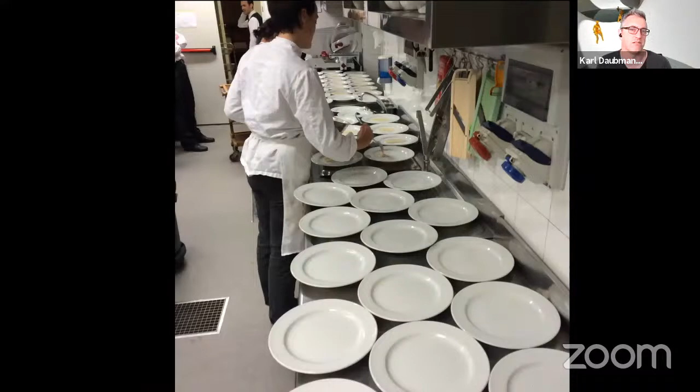We served a dinner one night for 60 people with the Borromini pasta. We didn't make custom plates for the 60 people, but this was plating it for that meal, and Tiziana bringing the pasta out. You can see some get a little squashed or flattened when you hand this off to someone else. But this was a really incredible experience - both making a meal, thinking about the culture and history tied to this, and all the way back to thinking about the craft, production, rules, geometry, and labor that goes into this.

A lot of the prototypes and studies here are early versions of the plate, and then the final version where we worked with a crafts team, a ceramic team outside of Rome to produce - I think I produced like 20 plates in the end for that.

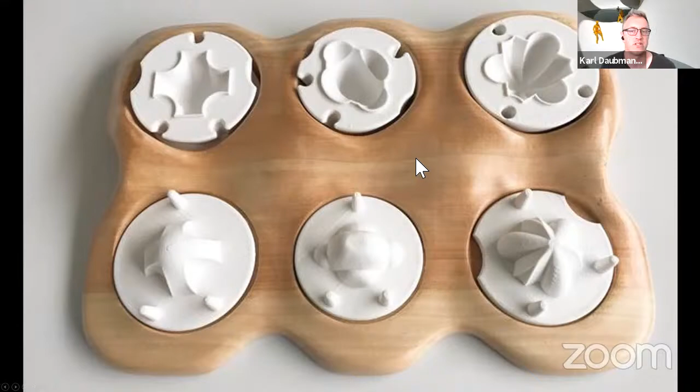And then a more recent version with an idea - these are still plastic 3D prints, but we're still searching for the right fabricator to mill these out of brass, with an idea that there'll be a custom tray that holds the 3 pasta presses.

Some of this work was published recently in a really nice collected essay book called Finding San Carlino. And I think there's discussion of it in the book on Body Object Enclosure too, which should be out in the spring.

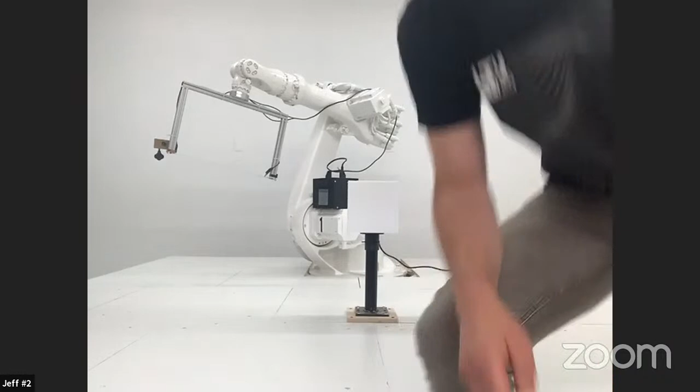It's great that you're here, Karl, now, so you can have a sense of what we've been doing these days. It's also a test run for your master's fabrication class. Exactly.

Yeah, and I'll spend some time. I'll be available to collaborate with Emily and Jeff now to troubleshoot some scripts and double check them. Which one is this?

Karl, we need a rotation platform as well. Starting to make requests here, just to be able to manage one cut and then rotate the cube, so they don't have to get crazy. Yeah, and perhaps a small Dremel tool, so next time we can start using Bianco to mill really small pieces. That would be amazing.

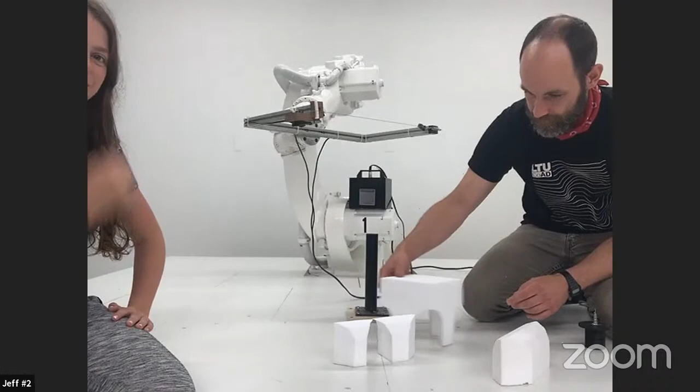Look at this. So those were two cuts. Awesome, thanks, it's done it. I think the next step will be to document these things. Oh, look at those, we have the positive and the negatives perfectly.

Yeah, so we'll talk about the documentation as well. You'll have these available, guys, as images for your portfolios.

So maybe Emily or Jeff could show the tabletop robots to the students in the workshop. We have not, no. Maybe if you guys could just turn the laptop. One of the other things we're thinking, I think we're pretty innovative as a school, is that we have 5 desktop robots. Angle it down so they can see the casters too.

So these tables can be checked out and rolled into the elevator and brought up to the studio space, so students can use the tabletop robot at their desk in studio to begin making some things. The plan is to have a small hot wire cutter - we have 5 of them. One is going to be a clay extruder, one will have a small hot wire cutter, one may have a Dremel. That way, this notion of being able to test something at your desk at a small scale can be tested and prototyped, then brought to a larger scale robot.

I think many of us are really excited about the tabletop idea. It's a daydream - during studio sessions, you can decide either to make models with 3D printers or using the robot. It's almost like going to the library in a lot of ways, to say, do you have a free robot? I'd like to have it for a couple of hours. That's amazing. Exactly, and so you'll check it out as a reserve system. You'll leave your ID card and get a robot and wheel it down the hall to your studio. Nice.

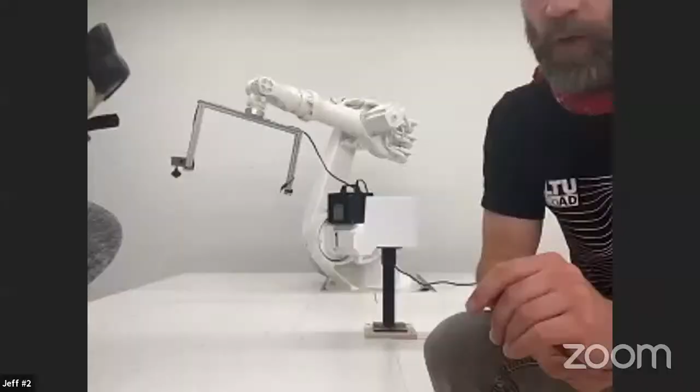So are we seeing another cut? Yeah, we're going to do one that cuts 3 of the 4 planes. It looks good in the software, but when we run the code on the robot, it hits a software limit on A6, which is the end axis. But it will cut 3 of the 4 cleanly, so we're going to go ahead and do it anyway since that much is ready. We may go back and fuss with the code later, but we're still going to use an extra block of foam for this so you can see it.

Perfect, which one is that then? Is it Spartacus with 4 cuts? Okay, all right, perfect.

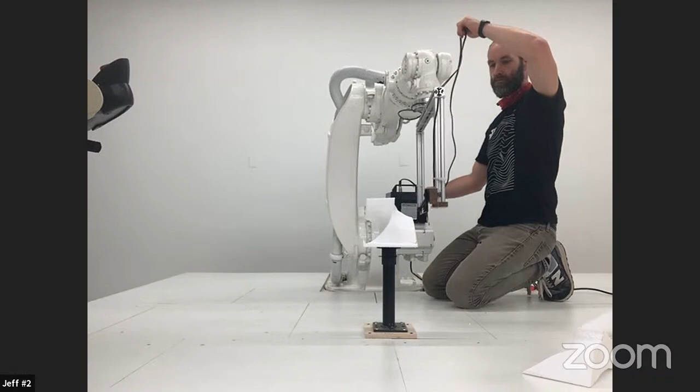This is going toward the next position, so just go to the next one. All right, that's where it stops. Yeah, it hits a limit on A6.

So we take it back to the recent one. Yeah, but at least we see this. It's cutting quite a lot though. Oh, look at that. So it's pretty cool, our cubes to start out with aren't perfect, so there's a little bit of extra here, but yeah, this one worked pretty well.

So I don't know, guys, if it's easier to just rotate the cube while you're there and rerun the third plane two times. I can try to fix the code without that rotation at the end, if you want, Jeffrey, or you can review it.

We'll take a look, we're real close to it right now. We've opened up all the files, or most of them at least, and in some cases we need to use some of the sliders to change the offset so that the travel motions between the start of one cut and between the two cuts is a little bit different. Well, yeah, we'll take a look.